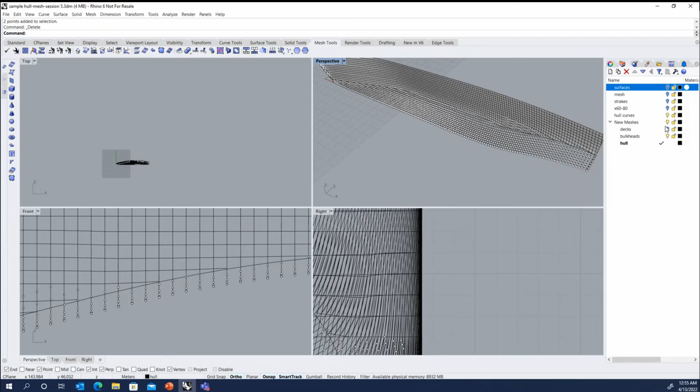So let's move to some of the bulkheads. And I'm going to turn off the hull curves there. So we'll start with just one as an example here. We'll mesh the bulkheads first. And again, we'd use the contour command and would set a base point center line going out, 1 meter spacing to match what we had on the deck.

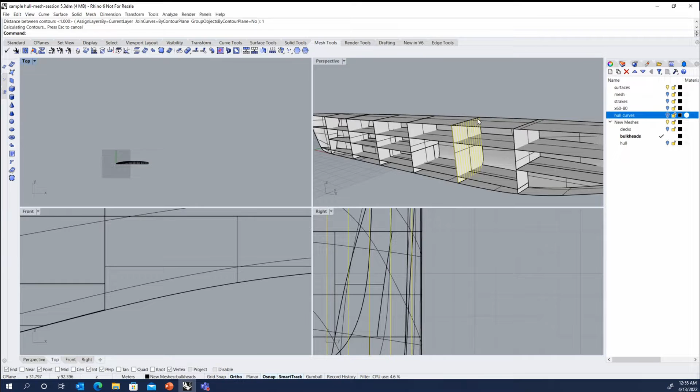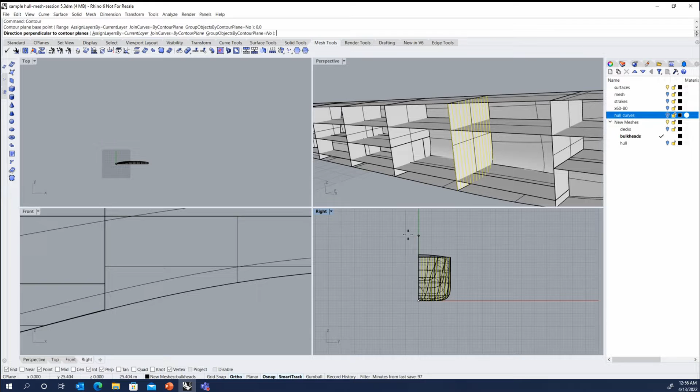And then vertically, we know this is at 2 meters. Well, there is no 7 meter deck here, but then there is one at 12 and so forth. So we'll use a 1 meter vertical spacing, and I can just right click to re-execute the contour command. Again, 0, 0, and click straight up, 1 meter spacing.

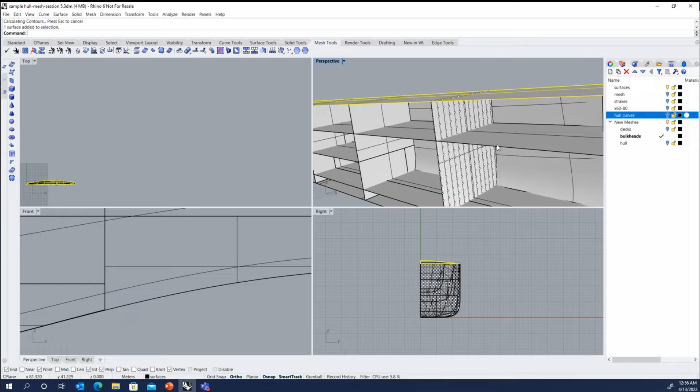Those points on the deck, this deck should be exactly at 12 meters back aft, but up forward we have sheer, so that would be something we may need to address. But we know that these nodes happen to be exactly on the deck, so I'm not going to bother deleting these nodes and extracting the nodes from the deck to replace them, because I know they're going to be on the exact same spot. What I will do, however, is extract the hull nodes, because we don't have nodes on the hull right now for those.

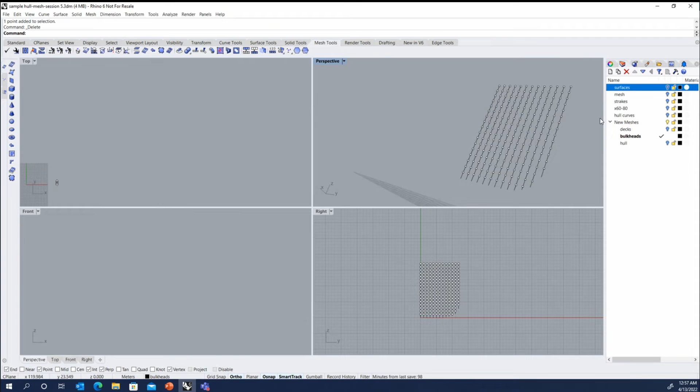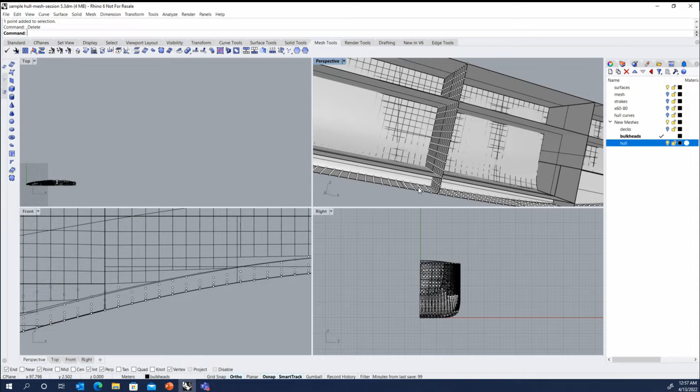I'm going to delete this one because it's so close to the hull. And we'll check down in the bottom here. Those look like they're far enough away. So now if we turn on our hull mesh, well, I have the nodes for the mesh that would be created there, so we'll use them. And this is why ideally we would have finished the hull, because we'd use the hull nodes to create the outer edge of our bulkheads. But we have enough of the nodes created that we should be okay to at least demonstrate this.

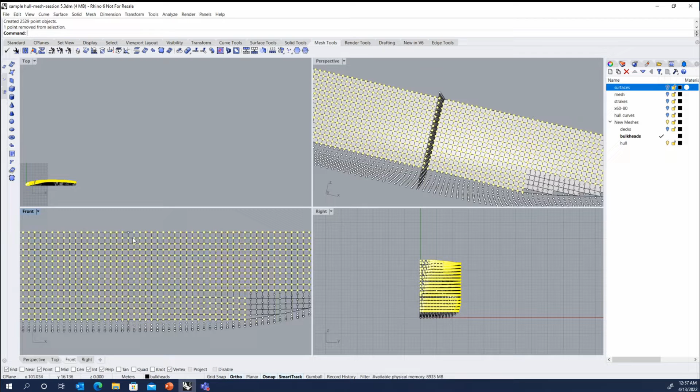And we do something very similar to what we did before. We extract the nodes. We are building this bulkhead. So I unselect one point so I could find it in this view, and I will deselect that column and hit delete. And now we have all of the nodes on that bulkhead that will tie it into the side shell, and we know those other nodes happen to be on the deck, so we should be in good shape.

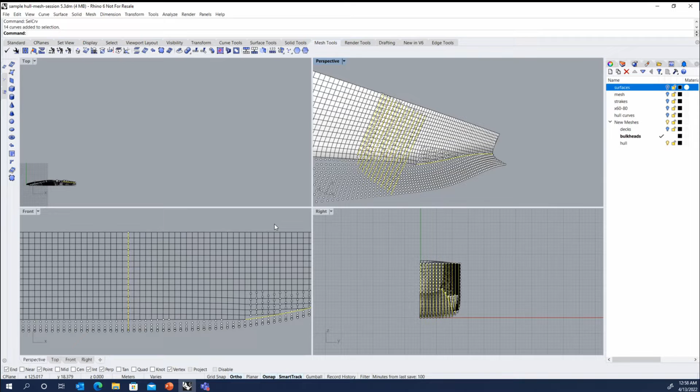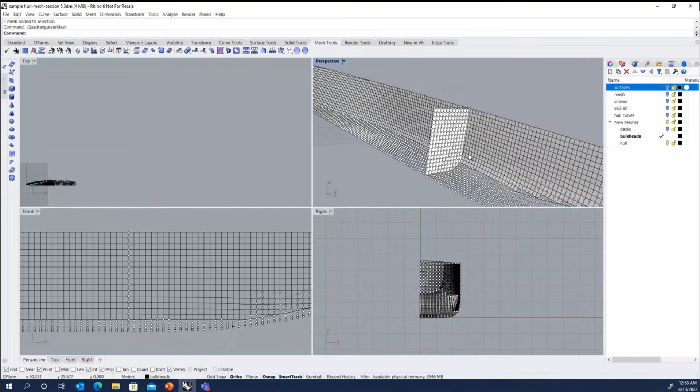If I select curves, we'll leave that one there for now, but I'm going to delete the bulkhead curves here. Select all of these nodes, 248 points, create our mesh, and convert to quads. Delete all of the upper nodes. We still need some of those for creating, and select the hull nodes in case we wanted to make that mesh. But you can see we have to manually create a couple of these.

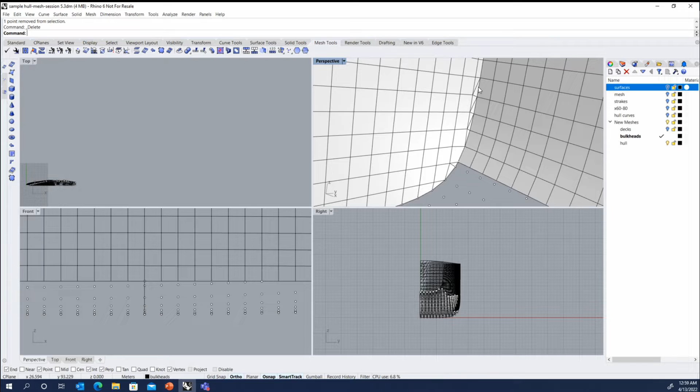Now, if we turn the surfaces back on, where it's getting close to the side shell here, you may not want that stiffener to come in and approach the side shell like that. You'd probably cap it off with a small intercostal here. But we have a little kink headed down to the side shell, so we can turn on these points. And we can do this now, or we can do it later when the beams were extracted. In fact, when I made the other hull earlier today, I extracted all the beams first, and then went in and made some minor corrections.

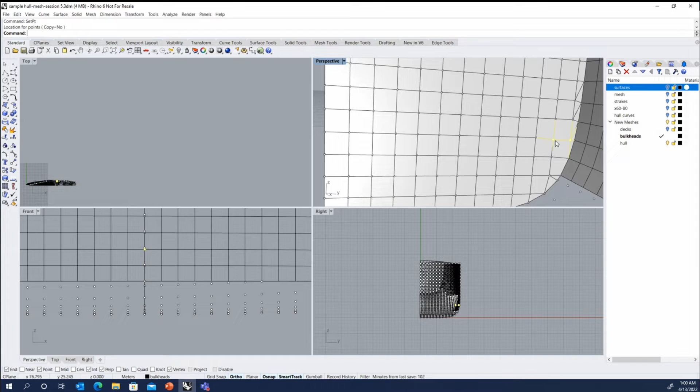And to do that, it's exactly the same process as here. You turn on the control points, you grab the nodes that you want to relocate, set point Z, and then I grab the hull node. So I've got a stiffener on the hull here, and I would have a vertical stiffener here, and I would simply have an intercostal coming across, and then this outer stiffener would just end at that horizontal stiffener. Here, I'm only working on the mesh.

This afternoon, I had the beam traces already extracted, but our beam traces have to use the same nodes as the mesh. So I just selected all of those beam traces, the curves, as well as the bulkhead mesh, and turned on the control points for all of them. And I selected the control points for both when I relocated. So it kept everything in sync.

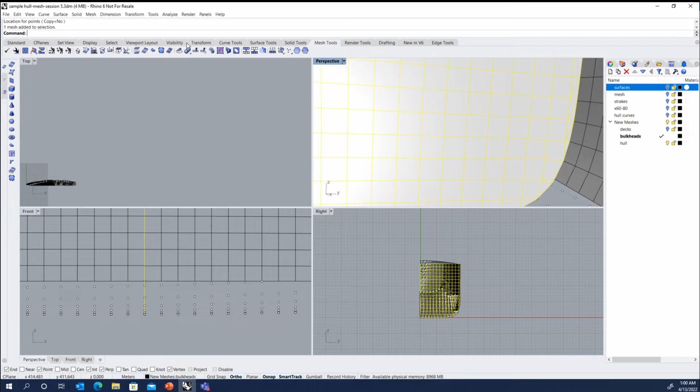And if we want, we can do this minor cleanup to get rid of some of those tris and convert them to quads. So creating the bulkheads is pretty straightforward. And in fact, you can do them in bulk by selecting a whole bunch of them.

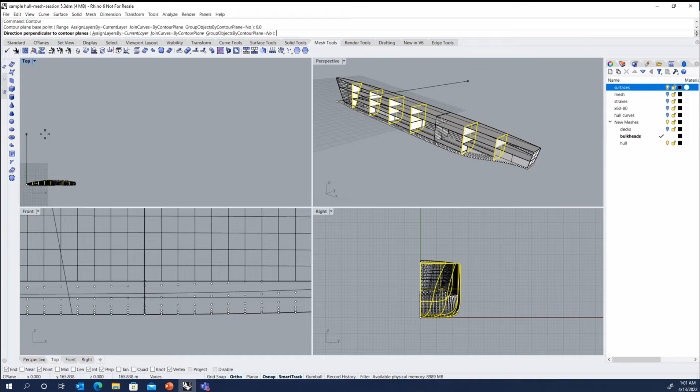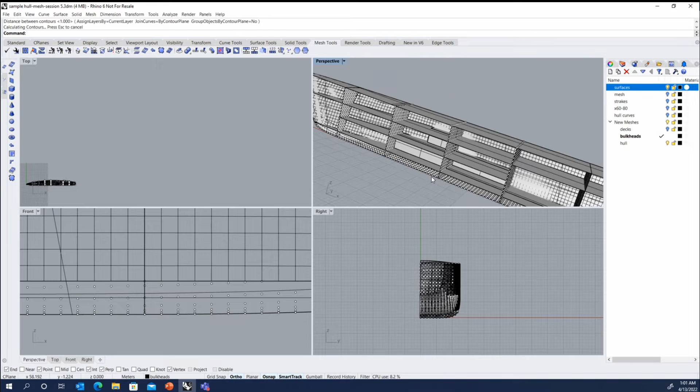We do the contour command. Transversely, again, vertically, and that same operation that we use to build this bulkhead, we just do on all of the others. For interior bulkheads where we're not dealing with that curved side shell, they're much easier actually to create.

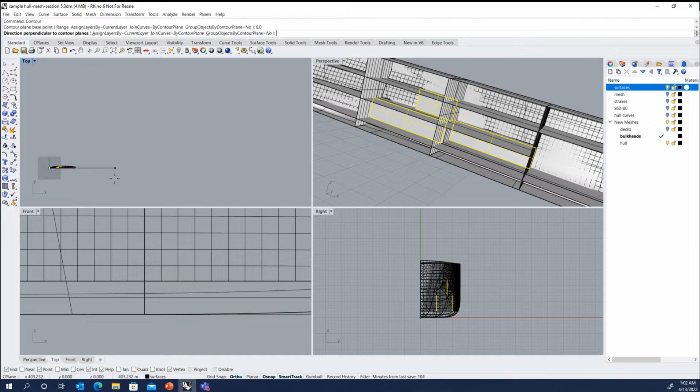So I do all three of these at the moment, but to make it a little easier, I'm going to select all of the points, and to make them easier to select later, I'm going to group them and hide them so that now I can grab these three bulkheads, use the contour command, and again, do 1 meter in the X direction, 0, 0, go vertically, 1 meter in the Z direction. And we have all of the points for bulkheads.

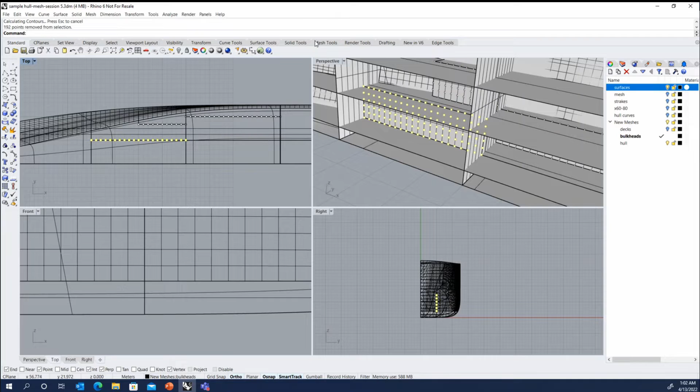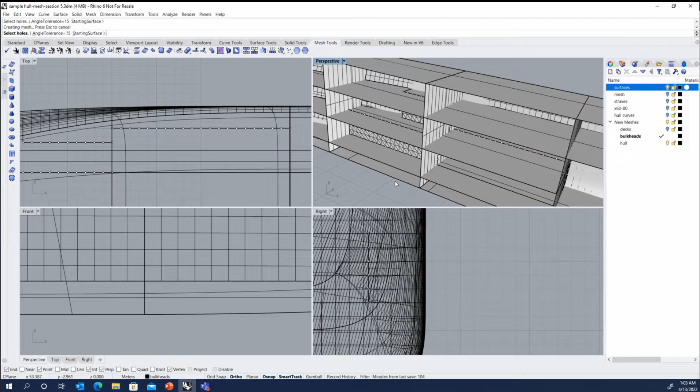So I'm going to just select these points and make our first one. All the points, and I'll deselect all of the curves with a crossing window. Make that one and do the same thing here. Select our meshes, convert to quads, and now we have all of our longitudinal bulkheads there.

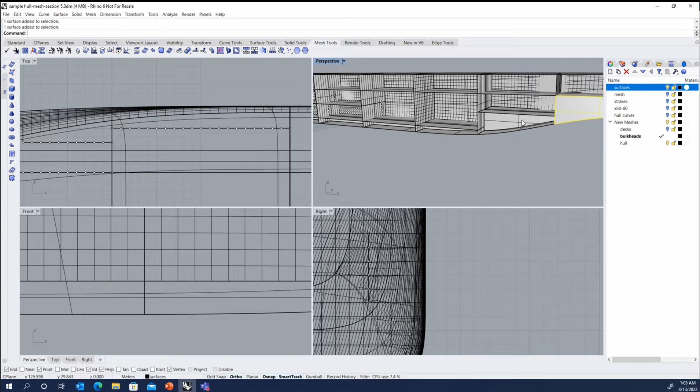The operation that we did to create the transverse bulkhead, I did the exact same thing to create these two bulkheads with the longitudinal traces. Essentially, we did the contour command longitudinally, contour command vertically to create all those points. And then I extracted the hull mesh to create that bottom border. It's essentially the exact same thing we did for the transverse bulkheads, just in the other direction.

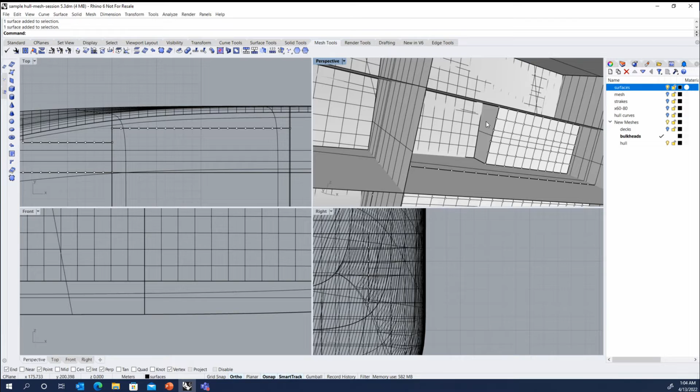Now for a smaller bulkhead like this one, it may not be worth cutting all those curves. We turn the decks back on so we can see the spacing on the deck, and we'll turn off the surfaces. So we just need to get from this to the side shell. So it is this row of points here. So I can take that row of points and just say copy, and actually let me unselect the curve. I only wanted the points. And I'll copy from the bottom node to the adjacent deck nodes.

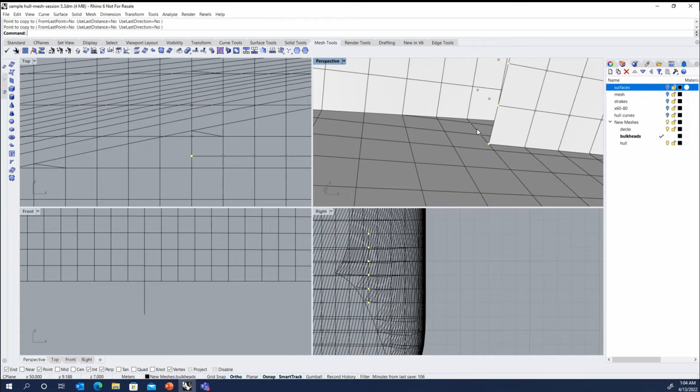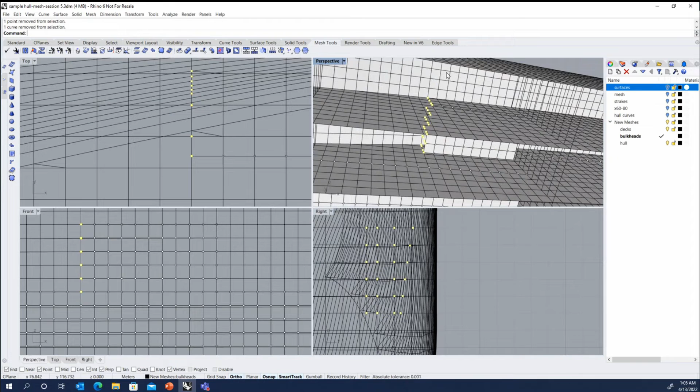I take the side shell and extract points. It's in this column, so I'll unselect the bottom node there and look for it over here. Unselect that column. And now I can grab all of these points. Now I'll make sure I get rid of that line, so it's just a collection of points. And then we do the mesh patch again. So sometimes it's easier to just grab the points.

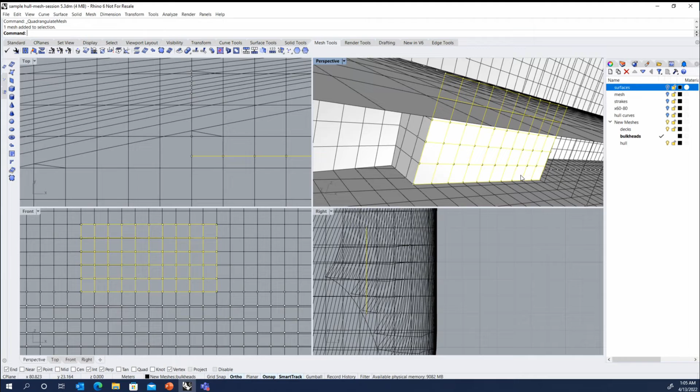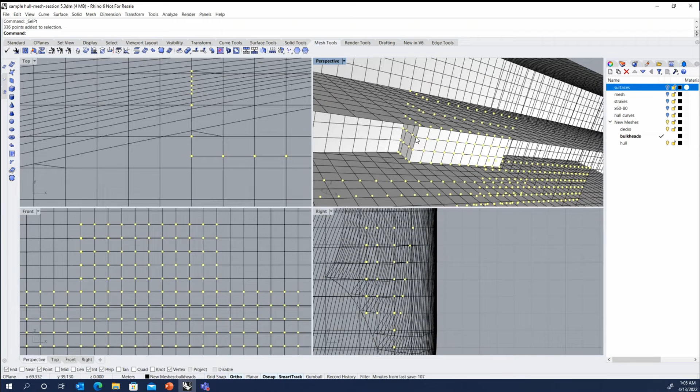Now, this also shows another issue where this bulkhead is not on an even 1 meter spacing to agree with our deck. So we need to cut that in so we don't have a free edge at the bottom here. So there's a couple ways of doing that. One, we can go and use the split mesh edge command, and that would let us pick this edge, and then we can split it and work our way down and keep splitting each one along the length. Or I'm going to select all the points and get rid of them here so we can kind of start fresh with this.

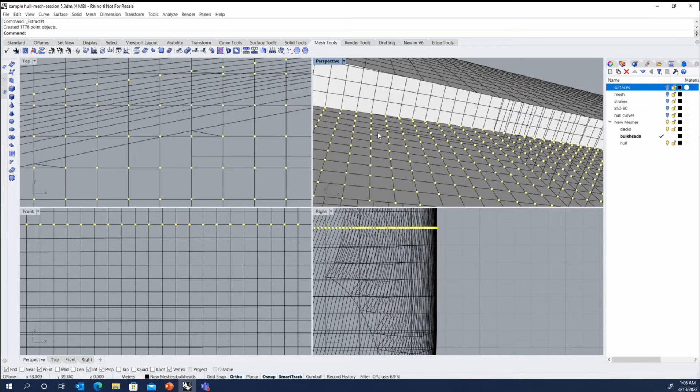Another way of doing this is, let's do this on the upper deck. It's a little easier to see. So we can see where that bulkhead hits and where we need to split this mesh. So if I extract points and want to keep the ones around that split plus one more, and I'll delete the rest. And if we select that mesh, extract points, and I just want to keep the ones on the top, we can come in here and delete the existing deck mesh.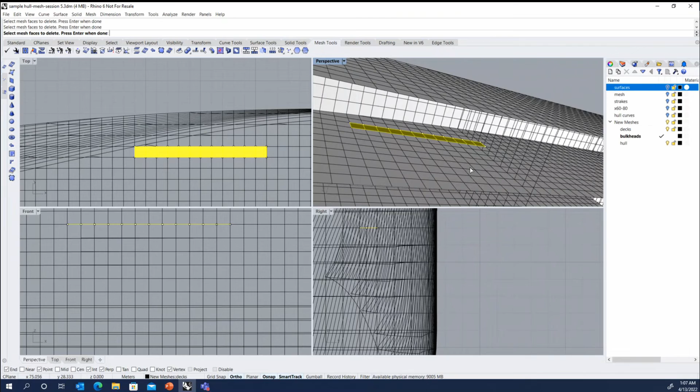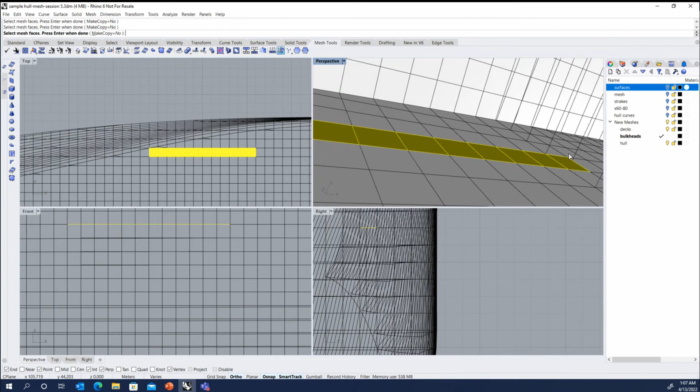Or actually an easier way of doing that, instead of doing the selection and what I just did before, I'm going to select all these points, get rid of them. And instead of deleting or extracting the points and everything, let's extract this mesh. This is the mesh that I want to split. So I'm just going to select all of the ones that need to be split, plus one at the end, because it's going to turn into a quad and a tri. And once it's extracted, then I can extract points, and I only have the points that I want. And I can delete the mesh.

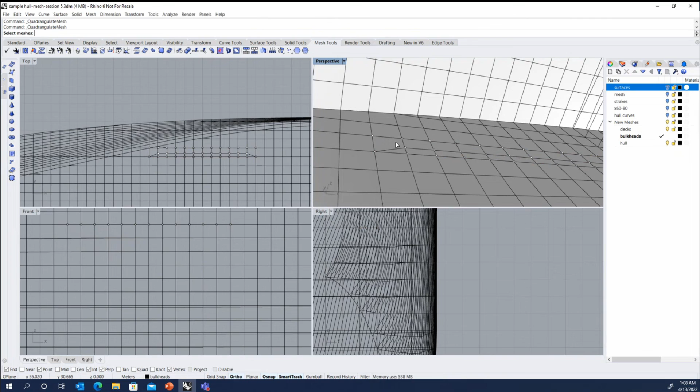I come in and I grab that bulkhead mesh and extract the points from it and just keep. And now I can select all of these points, create a mesh patch, quadrangulate, and join it into my deck. So that's a nice, quick, easy way of filling that space. And I did the join. Let me again, so that now when I select those points with a window, only getting the points, leaving them.

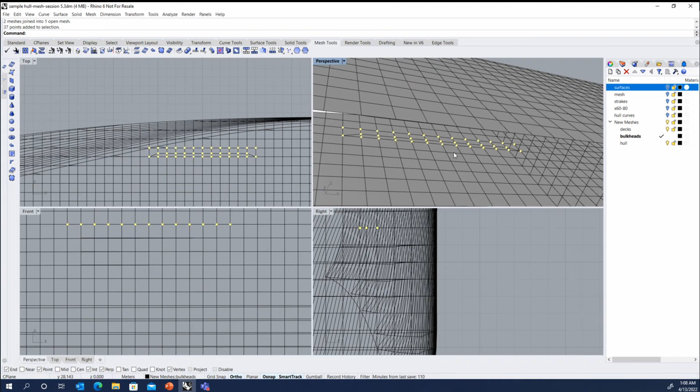So now I have a point-to-point connection with the bulkhead, and I would do the same thing on the deck below, as well as the vertical bulkhead back here. So that's basically how we would generate the mesh in here.